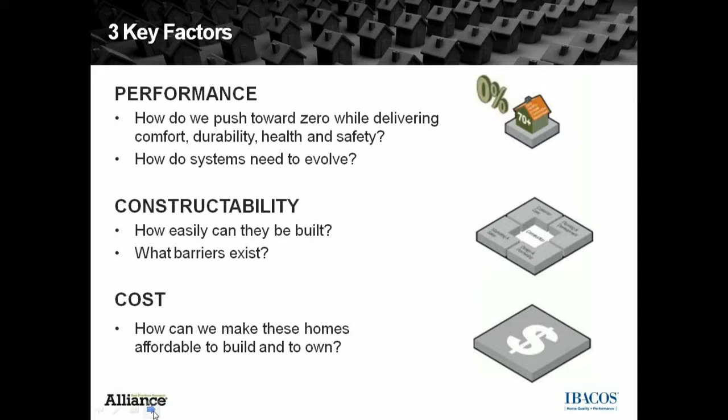Then the other part is how easy are these systems or components in this home to construct. And we went through probably 5 to 6 months of just trial and error and modeling efforts and looking at different systems regarding wall performance, regarding mechanicals, and we selected different systems in regards to performance, constructability, and cost. Obviously, cost is probably the most important piece to this project, so we wanted to make it as affordable as possible. So some of the research that you'll be hearing in the next 25 minutes will address some of those systems. So go ahead, Nick.

Okay, so how do I get this to you? Okay, so first we're doing some.

We're looking at a de-superheater and the performance of one in the home. This diagram indicates a typical ground source heat pump, with the exception that we have a de-superheater that's located between the compressor and the condenser portion of the refrigeration loop. And the de-superheater basically takes some of the heat of compression away from going down into the ground, particularly during the summertime, and reclaims that heat with the use of a heat exchanger, and we're able to use that heat to generate domestic hot water.

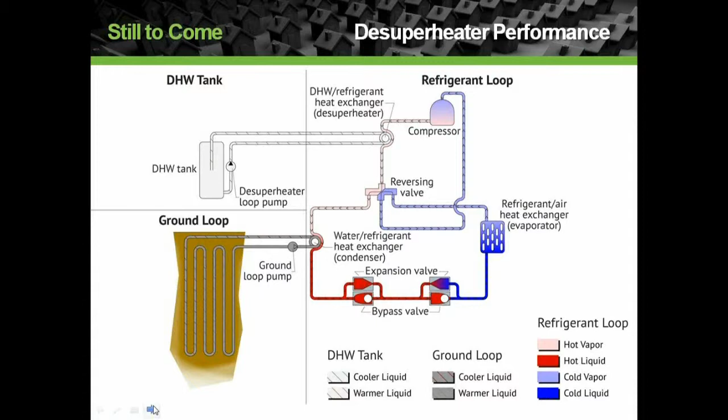So this is the plumbing side of the de-superheater, and as you can see here, we have a two-tank arrangement where we're going to the first tank, and then it can cycle back into the second tank. We have the valving so that we can either have a two-tank arrangement or a single-tank arrangement. You'll note the drain water heat recovery equipment that is installed but currently not being utilized in the home.

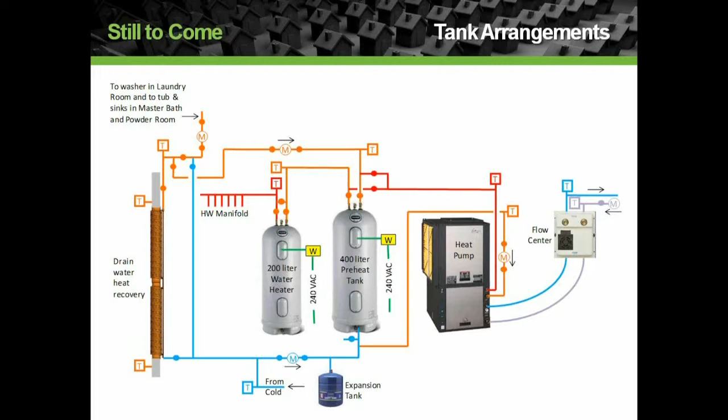Okay. So here is a photograph of the equipment as it's installed. To the right is the ground source heat pump, and then the two tanks. So we submitted a draft plan for short-term testing to NREL, and the research questions that we're going to address are: we want to determine if the heat pump de-superheater operates as predicted in the TRNSYS modeling.

The second objective is, what is the efficiency of the water heating system for each equipment mode? So whether it's a two-tank versus a one-tank, and which one makes sense to use. And then the third research question is, quantify the impact of de-superheater operation on the measured heating and cooling COPs of the ground source heat pump. How does this affect this efficiency?

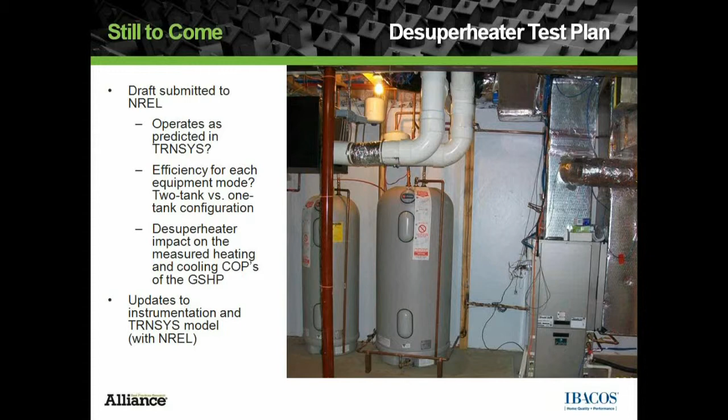And as part of doing some of this testing, we had to do some changes to the instrumentation as well as the TRNSYS modeling to make the short-term testing easier. So some of the things we're looking at in short-term testing are the ground loop inlet and outlet temperatures, the domestic hot water supply and return temperatures, the de-superheater supply temperature in the heating mode and the cooling mode,

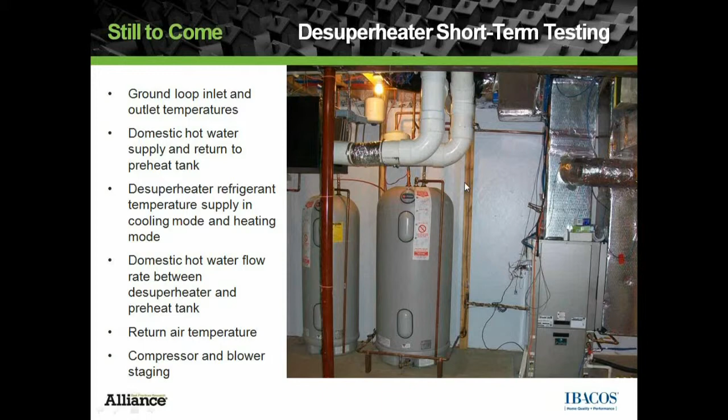and the flow rates, as well as the return air temperature of the unit, and what staging are we at as far as the compressor and the blower. So we want to know what the unit's doing with all these other parameters. So that's what we're going to be doing for domestic hot water. So Anthony, what are we looking at for thermal enclosure performance?

All right. Well, moving on from the mechanicals, we're going to talk a little bit about thermal enclosure. Obviously this house is very airtight, and like I said before, the walls are R40 walls. From outside to inside, we have vinyl siding, house wrap with all water managed details, flashing and so forth. Then we have 2 inches of XPS foam on the wall, and then we have basically a 2x8 wall with staggered 2x4 studs, and that is insulated with JM Spider insulation.

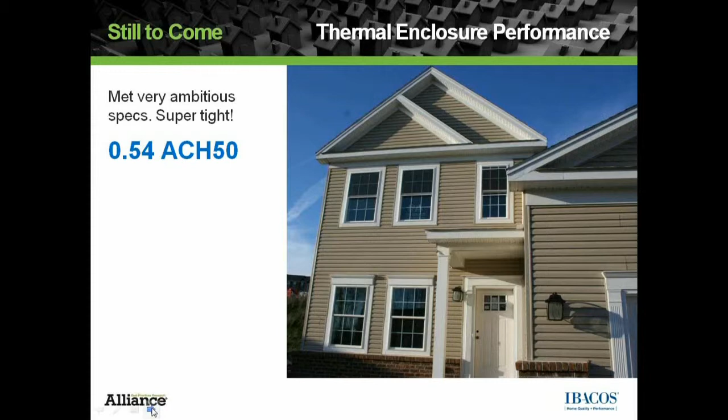So very thick wall. And what we want to learn is, how do these walls manage moisture from within the home, and are we going to see any condensation potential in these wall cavities? So basically, over the last 18 months, we installed occupants. Well, they're really not occupants; they're devices. As you can see in these pictures, we installed humidifiers and radiant heaters in many of the rooms and bathrooms to simulate occupants: their breathing and the heat they give off, and we're simulating cooking events and shower events.

So over the last 18 months, just from generally looking at the data on relative humidity, in winter our ranges are between 27 and 49% RH, and in the summer they range between 38 and 55. So they're probably slightly higher than a traditional leaky home, but this home is really airtight, so a lot of that moisture is being retained in the home. With high-performance homes, one of the research ideas that we have is, how well can these homes manage moisture, and what types of strategies are needed to control these environments.

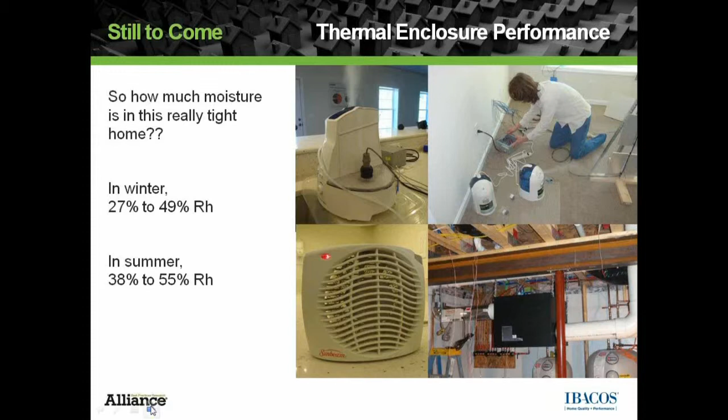When you have thermal bridging of the 2 panels coming together, what does that do to the condensation potential? And also, we're looking at between 2 windows where you have a little bit more framing. What does that do in those cavities in regards to condensation potential?

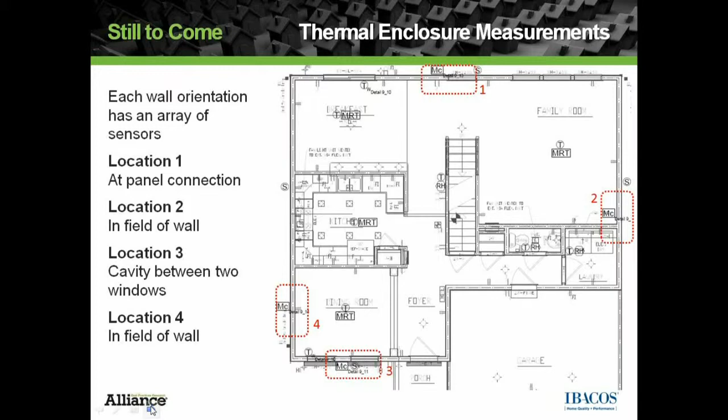Moving on. What we did over the last 18 months was we looked at just general observations when we go into the home, when we look at the monitoring data and so forth. What we observed over the last 18 months was we haven't seen any signs of condensation on any interior surface, whether it be on the foundation, the slab, windows, drywall, baseboards. No evidence of condensation, so that's a very good thing.

But what we really want to know is what's happening within the walls. What we did here was we developed a condensation analysis tool. It's basically a dew point analysis tool, and we wanted to run just a simple model. As you can see where my arrows are pointing, this wall system that we installed is on the borderline of being an acceptable solution, because of the amount of cavity we have, the thickness of the 7.25 inches of fiberglass. That insulation is keeping that first condensing plane a lot colder. So we want to find out, are we actually seeing any condensation or are we not?

Looking at the data will help us better understand some dew point analysis tools and also some WUFI analysis tools, which we've modeled also, that give us some indication of some slight risk. But we also want to understand, if there are some instances of condensation in these wall cavities, how quickly does it dry out over time? So that's one thing that we want to try to learn.

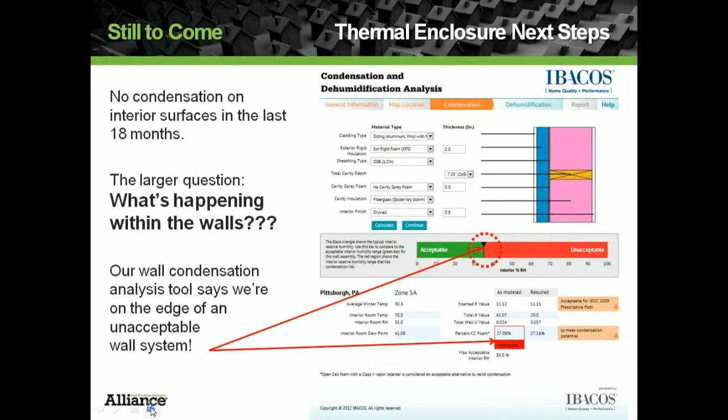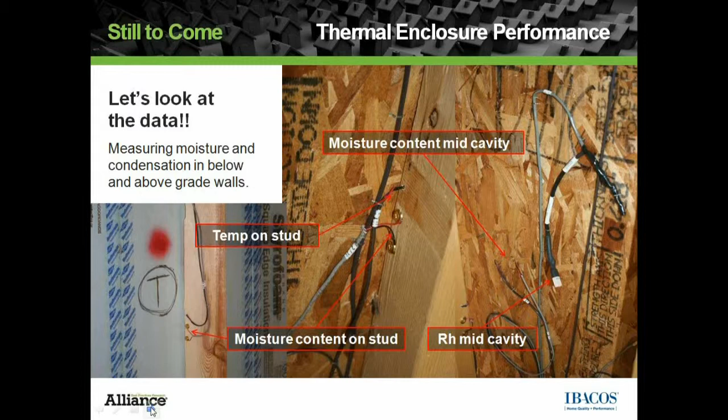Within these walls, these are the types of arrays that we have. Each orientation of the wall has an array within the cavity and an array on the stud itself. So basically we're measuring humidity, moisture content, and temperature in all the areas of the OSB and of the stud surface. Over the next 6 months, we're going to try to look at this data. Currently, we're not funded to do this research, but we do want to continue looking at the enclosure to give us some more insight on the home in general.

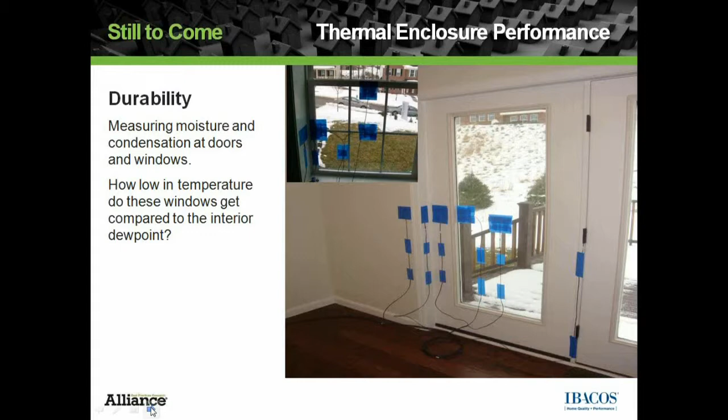Some of the other areas we're looking at are window and door surface temperatures, to understand, is there any condensation potential? Like I said, we did not observe any condensation, but how close are we to the interior dew point? Are we 2 degrees off from condensing, or are we 10 degrees off? So these are the things we're trying to understand right now.

And then lastly, all this data is being fed through all these wires in this home, and now we have to go through all these lines of data, graph them and start reviewing them. So within 6 months' time, hopefully we can have another webinar and present you some findings on the thermal enclosure.